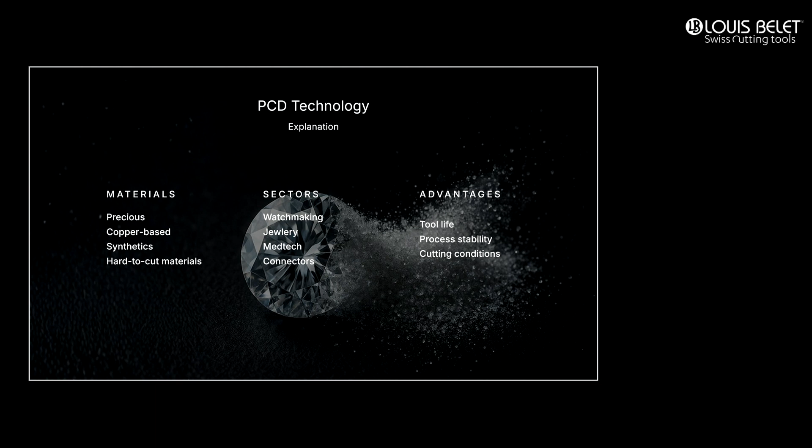But Hervé, tell us something. What exactly is PCD? Yeah, good question. Just like carbide is tungsten powder bonded with cobalt, polycrystalline diamond, or PCD, is diamond powder bonded with cobalt. So we are taking the hardest material on Earth and bonding it with cobalt to give it the toughness needed for cutting. With PCD, you can machine non-ferrous material like platinum and its alloys, gold, lead-free brass, and much more.

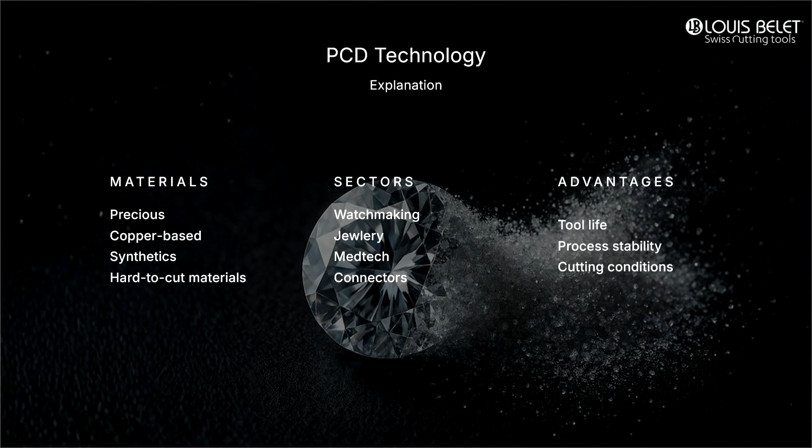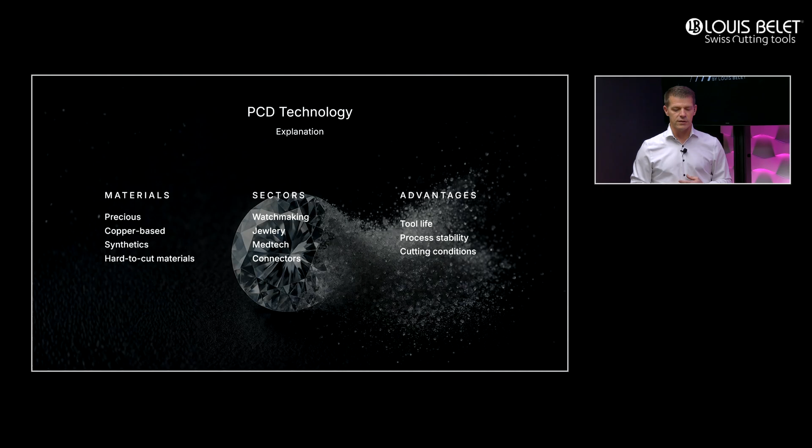But what makes it truly powerful, you can tackle the really tough materials: gemstones, ceramics, sapphires. Every sector from watchmaking through medtech to electronics needs these capabilities. The advantages of PCD are clear: exceptional tool life and the ability to run extreme cutting conditions thanks to its incredible hardness. And as we'll show you, that changed everything.

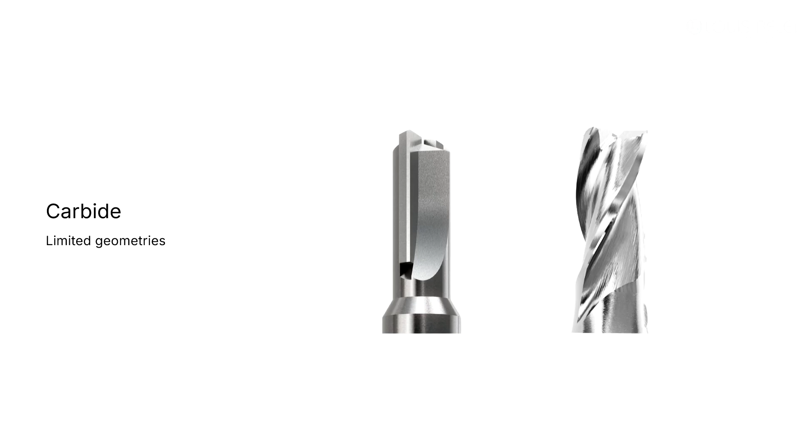So PCD sounds amazing, but I'm guessing there have been some challenges in bringing this technology to micro tools, haven't there? Absolutely. Until now, when you wanted to switch from carbide to PCD micro tools, you were limited to what we could offer: straight-edged designs on brazed inserts. It was the only way we could do it. At Louis Belet, micro tools are defined as tools below 3 mm or 1/8 of an inch.

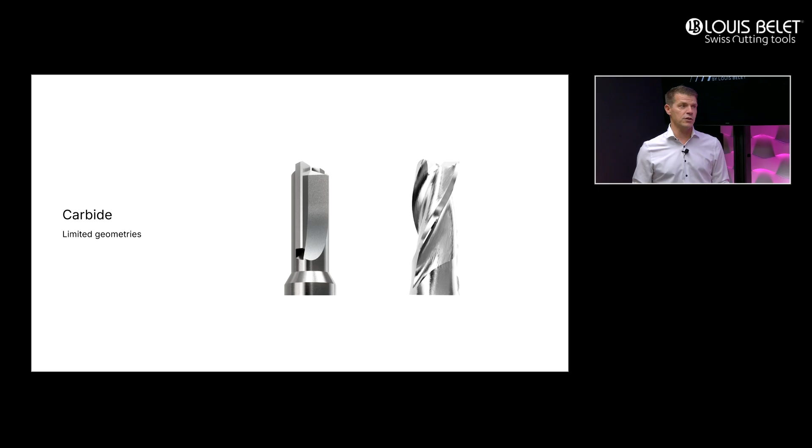But this approach had a critical limitation. We couldn't produce true micro tools because there simply wasn't room for an insert design. And perhaps more importantly, we couldn't optimize the cutting geometry the way modern machining demands, like the angles, the flute design, the surface finish. It was time for a change. And that's where Excalibur comes into play, right?

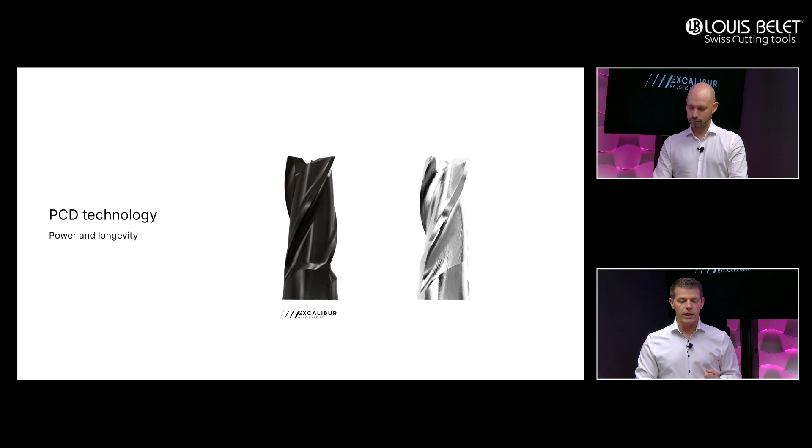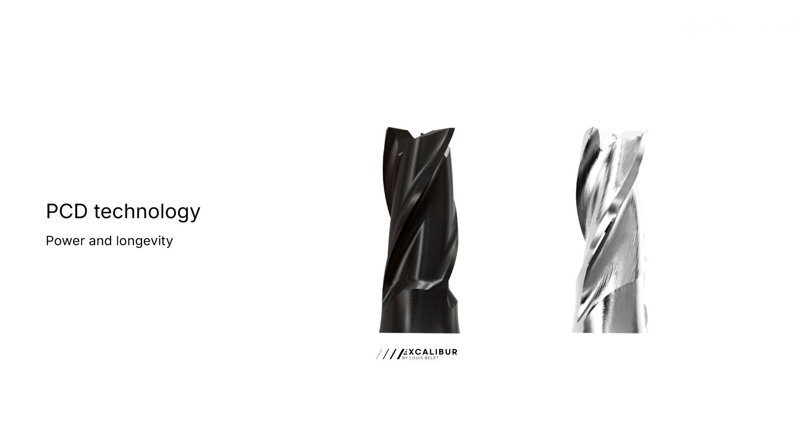Correct. For the first time, we can now offer PCD with geometries specifically optimized for cutting performance. Tools that combine all the advantages of PCD: the tool life, the reliability, the cutting power, with cutting edges that were impossible to achieve before. And here's the real breakthrough. We can make these optimized tools in sizes that were previously impossible. Micro diameters that unleash new possibilities for your precision machining.

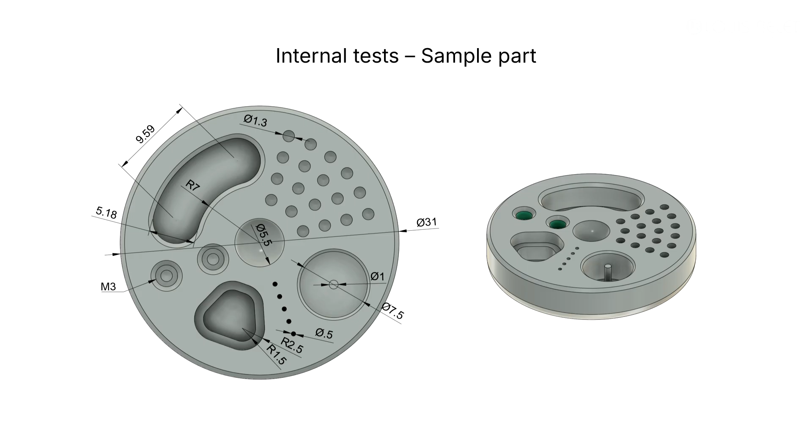Can you show us what this means in application? What you are looking at here is a part with complex geometry, multiple pockets, depths with radius features, precision holes in various sizes, and an intricate surface finish. This part will be used in this webinar, but will also be the reference for future tests, like in titanium, or any further webinars. Let's see it in action.

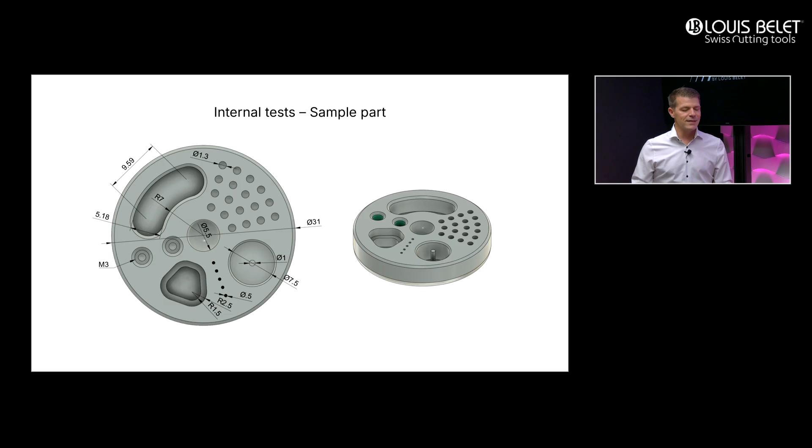Yeah, what you will see in the next slide is real machining on PEEK using our Excalibur tools. This precision component is made with unfilled PEEK, a high-performance engineering polymer used in industries like medical, aerospace, etc. This is exactly the kind of part where traditional carbide struggles. The combination of depth, precision, and the material properties creates extreme demands on tool life and cutting stability. This is where Excalibur excels, delivering consistent surface quality through an entire production run without a tool change.

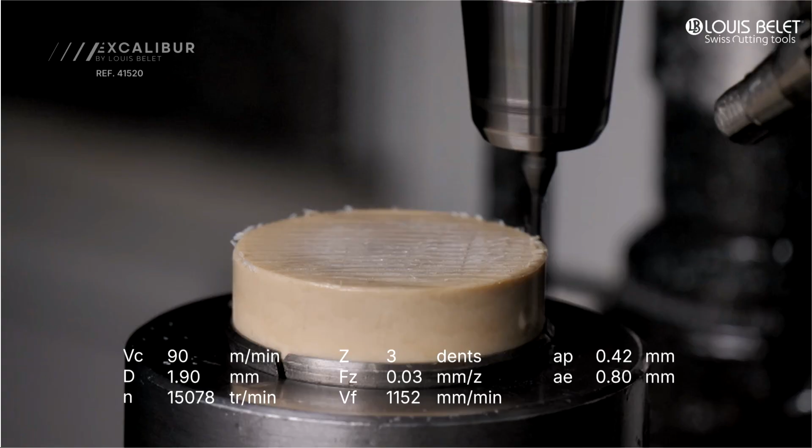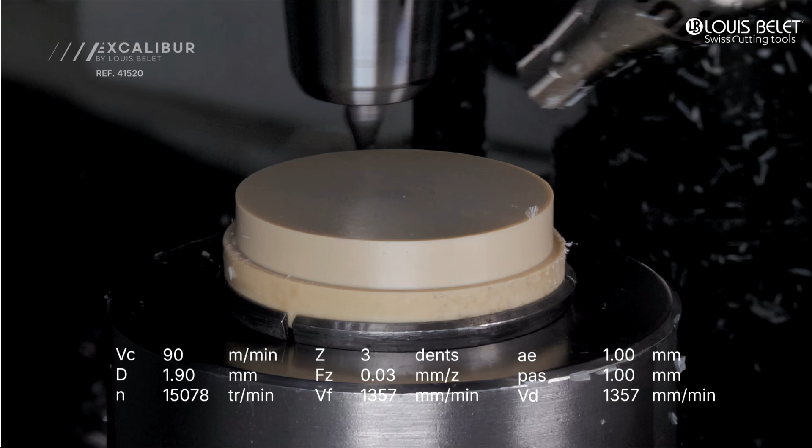You notice now the smooth, controlled cutting action. That's the optimized geometry at work. We are running a comprehensive sequence of operations here. It starts with surface finishing using a 3-flute helical end mill at 90 meters per minute, cutting at an aggressive feed rate with exceptional surface finish. Then we move into peripheral milling, creating the walls of the cavities with precision depth control.

See the transition into the slot operations. That's where we use our angle cutting tools to reach challenging geometries. The 1.5 mm or 59 thou diameter 90 degree angle end mill is working at 100 meters per minute, cutting very fine features with consistent tolerances. We are also completing pocket operations with a ball nose end mill for the radiused cavities and thread-cutting operations using our specialized whirling tool, all maintaining perfect process stability. Wow, this is production efficiency at its finest, really impressive.

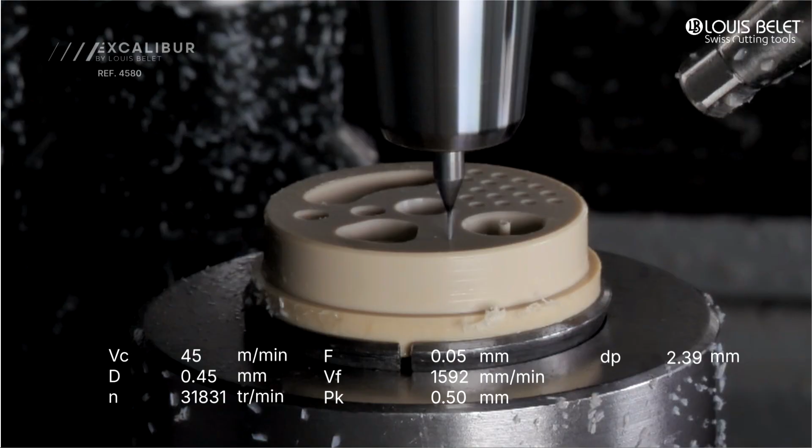For the drilling operation, we are using our 2 flute micro drills with a diameter of 0.45 millimeter, or roughly 17 thou. Notice how the PCD geometry delivers superior chip evacuation. Chip management is handled thanks to its optimized flute design.

Can you break down the specific cutting parameters for us? Absolutely. These are the precise parameters for each operation: cutting speeds in meters per minute, feed per tooth, spindle RPM, and axial radial depths. Notice the consistency. We are maintaining high productivity across all operations while the tool holds its edge throughout.

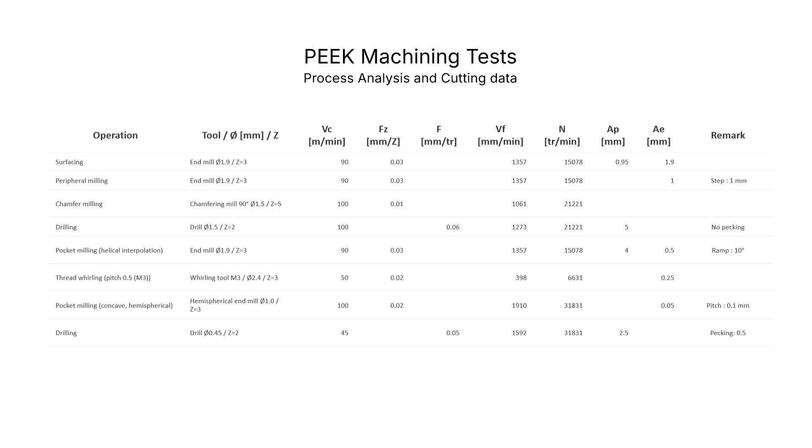This is the real-world performance that translates directly to your production line. We could think that these parameters are not too high in performance, but in order to maintain low burr, and because we are working with no coolant, 100 meters per minute is a very good performance. Notice the RPM value that needs to be handled.

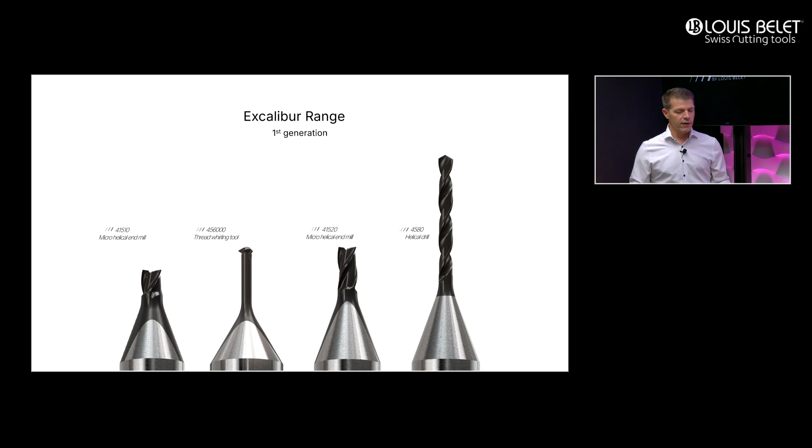So what exactly is available in the Excalibur range today? We have created 2 specialized end mills with different useful lengths, one at 1 times D and another at 2 times D. Combined with a precision 2 flute micro drill and our proven whirling tool available from S.6 to M3.0, this gives you a basic toolkit for precious metal, copper alloys, and synthetics.

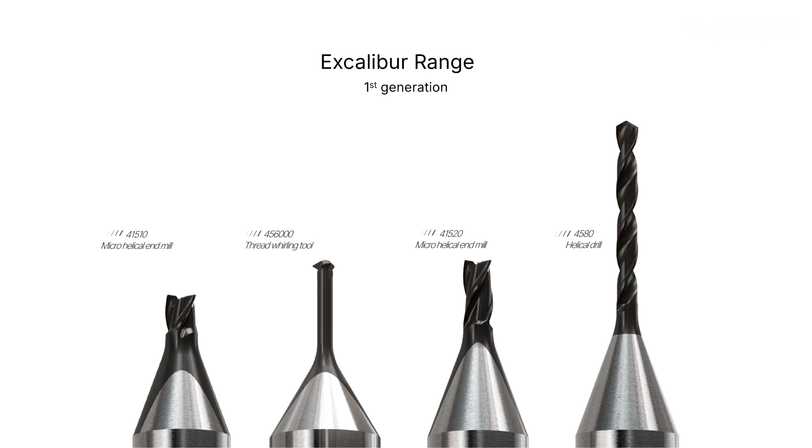Can you share more details about these end mills? Yes, we have designed our 41510 and 41520 end mills as the PCD answer to one of our best-selling carbide tools, the Series 15. That tool earned its reputation for versatility and performance, and these PCD versions raised the bar significantly.

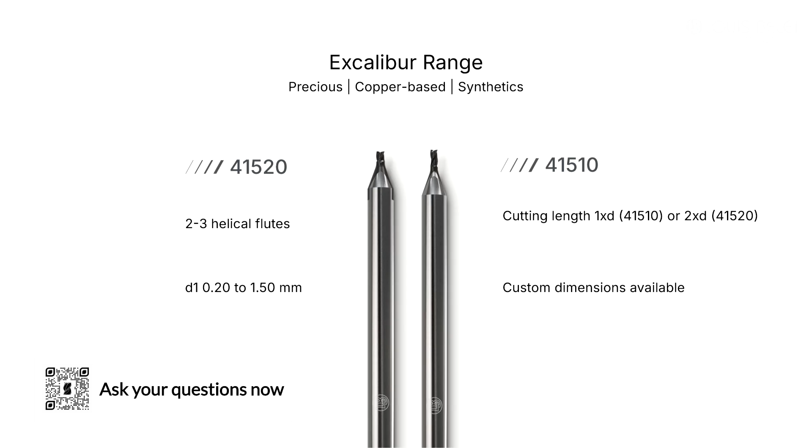Both are engineered to excel in roughing and finishing operations across precious metals, copper alloys, and synthetic materials. Our goal was straightforward: create a cutting tool with maximum cutting power to produce burr-free parts consistently, run after run. Here are the key design features.

We have integrated 6 degrees radial rake angles with center cutting capability, combined with 9 degrees angles at the diameter. The 30 degrees helix angle optimized chip evacuation and cutting dynamics. And we've reinforced the core to handle the demands of aggressive cutting.

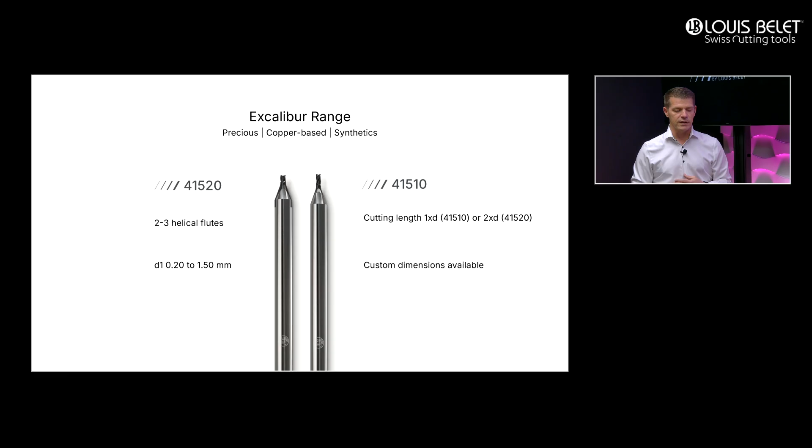For diameters from 0.2 to 0.4 millimeter, or 8 to 16 thou, these tools feature 2 flutes. Above that number, we move to 3 flutes for additional cutting power. It's precision engineering in miniature.

We saw a drill in action during the video. Please give us some details about it. Absolutely. Let's focus on our 4580 micro drill, and this one is special. Engineered for precious metal like platinum and copper alloys, the 4580 features a 120 degrees point with a specially thin core. This geometry delivers exceptional performance in challenging materials.

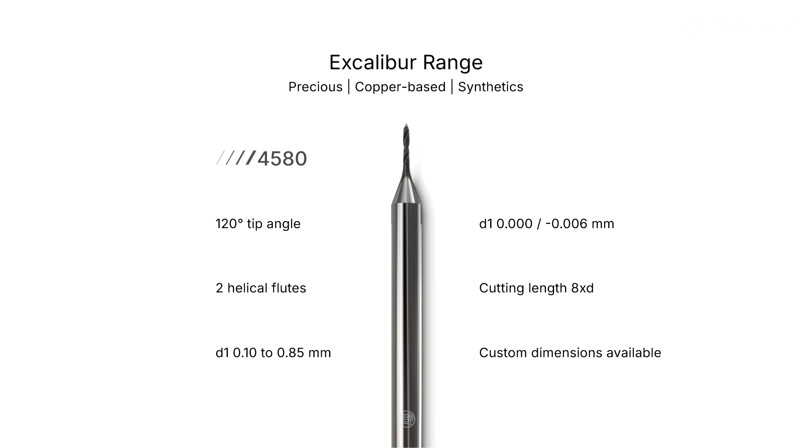Equipped with two helical flutes with a 30 degrees helix angle for superior chip evacuation, the 4580 stands out in one critical way, its diameter range. We're offering the world's smallest micro drill at just 0.1 millimeter, or a bit less than 4 thou.

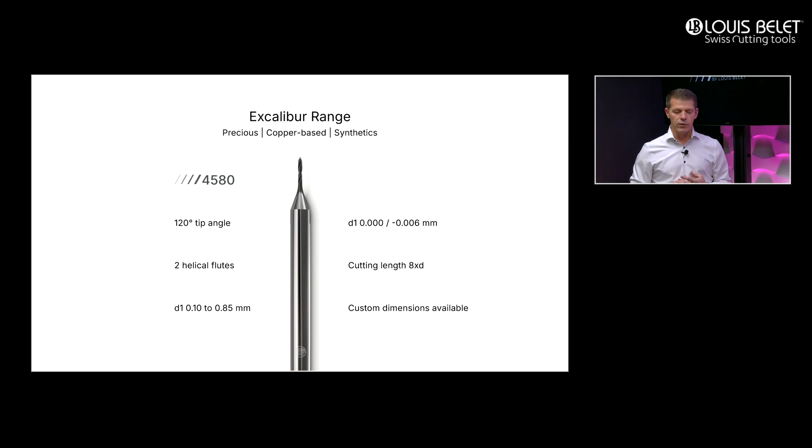The standard upper range goes to 0.85 millimeter, which represents 33.5 thou, but if you need a larger PCD drill, we're ready to support you. Just reach out. This is where precision becomes possible.

These specifications are impressive on paper, but can we see the actual cutting-edge quality? Yes, let's start with our end mill, the reference 41520. These images were captured using SEM, scanning electron microscopy, which reveals the cutting-edge quality at an extremely high magnification. As you can see, the cutting-edge geometry is remarkably homogeneous along its entire length.

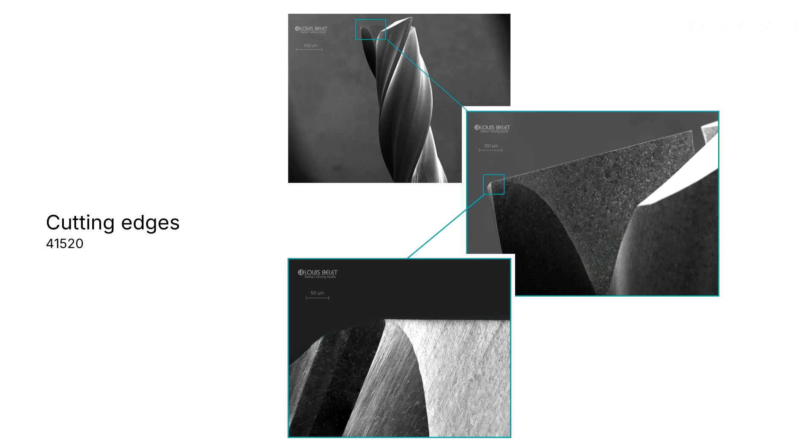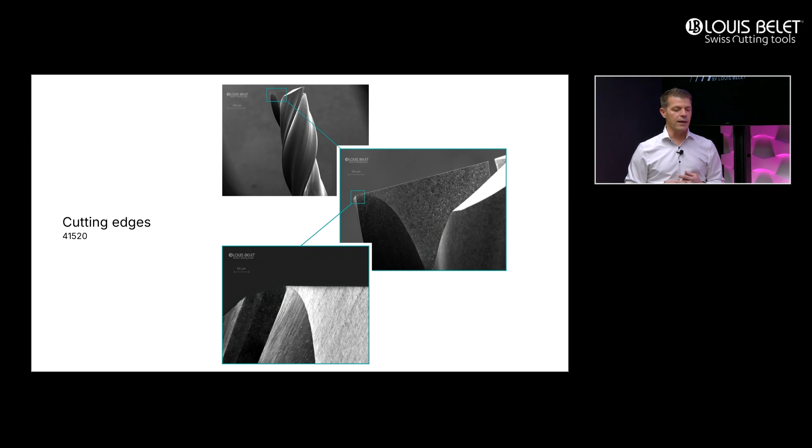Great! And let's now move to our twist drill, reference 4580. Once again, using SEM imaging, we can observe the same exceptional quality. The cutting edges are extremely homogeneous and sharp. Notice how they appear almost polished.

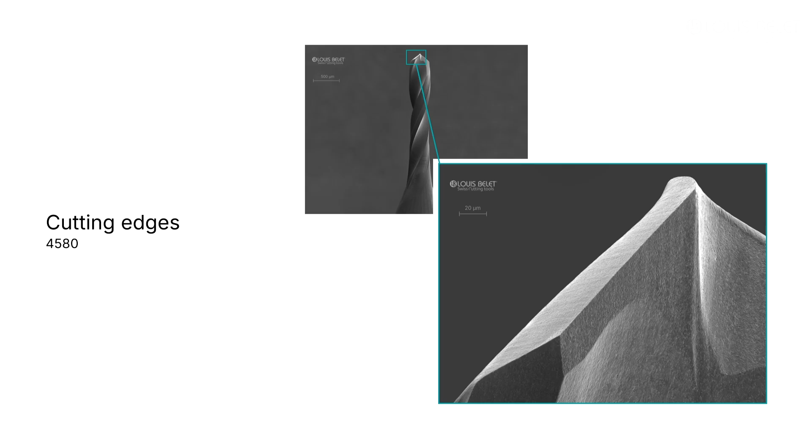And here's what makes this truly remarkable. This mirror-like finish is achieved directly through our new laser technology. There is no post-processing, no honing, no additional treatment required. The tool comes out of the manufacturing process in this condition.

Why does this matter? Because this ultra-smooth, sharp edge significantly reduces chip adhesion during drilling operations. Less chip welding means better chip evacuation, improved hole quality, and longer tool life, especially critical when drilling through hard and abrasive materials. This is the result of years of development in our laser manufacturing process, and it's what sets our PCD drills apart from conventional solutions.

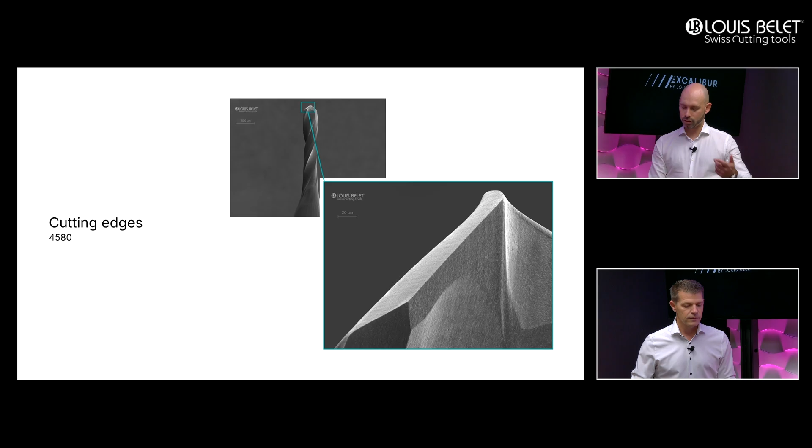This is great and nice for theory, but can you give us a practical example? Yes, one of our customers faced a persistent problem.

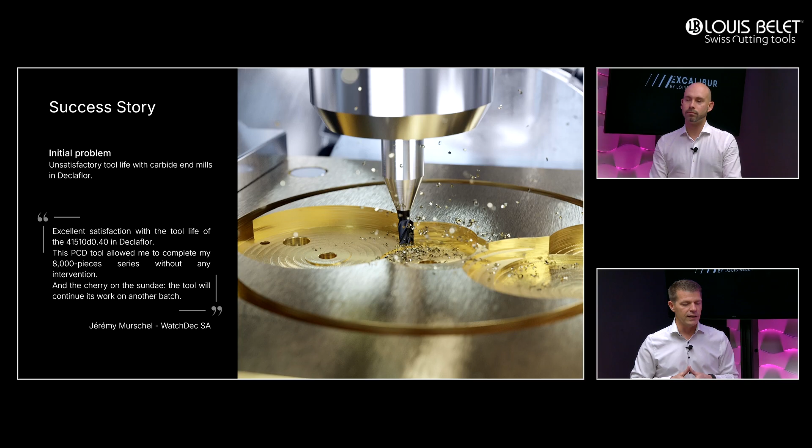Carbide end mills simply weren't cutting it anymore in their Declaflor finishing operation. Declaflor is a copper alloy with nickel and tin, used in the watch industry for movement parts and other industries. Tool life was disappointing, and they needed a solution that would let them complete production runs reliably.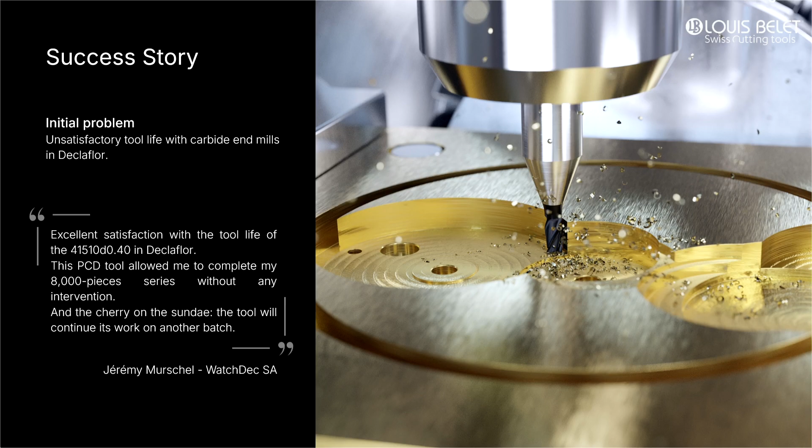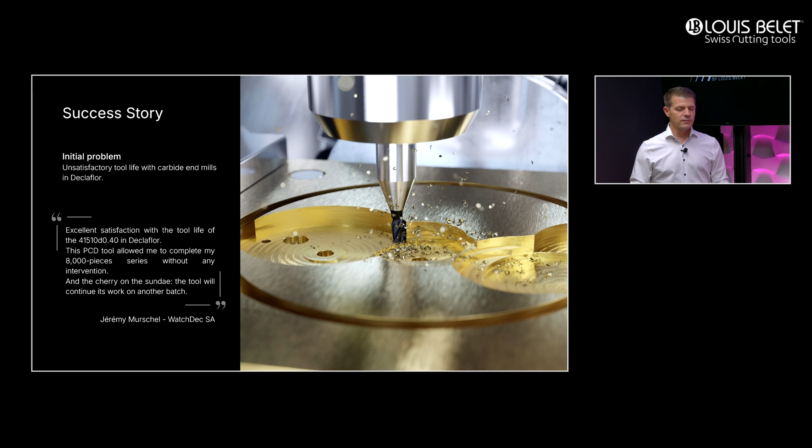They switched to our PCD end mill, and the improvement was immediate and dramatic. They completed an entire 8,000 piece production series without a single tool change. Not one. And when the tool finished the series, it transitioned seamlessly to another production run. We have to say a big thank you to Jérémy Murschel for sharing this experience.

Wow, that's not just efficiency, that's transformation. Knowing Louis Belet, I'm sure you are working on special things for the future, aren't you? Yes, absolutely. You know us very well. Today we have the honor of exclusively previewing the next phase of Excalibur development.

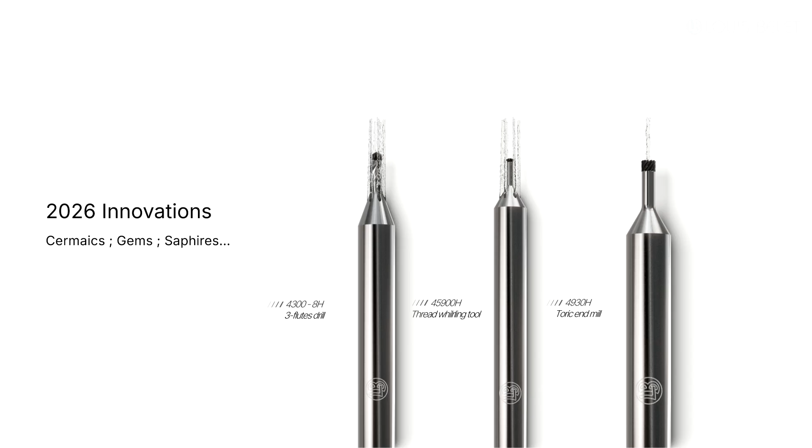These new references have been specifically engineered for the hardest materials: ceramics, sapphires, gemstones, and carbide—materials that traditional tools simply cannot handle effectively. In this expanded Excalibur range for hard material machining, you'll find specialized drills, toric end mills, and our advanced whirling tools. But that's just the beginning. We're adding ball nose end mills and angle cutting tools that open entirely new possibilities for complete geometry finishing.

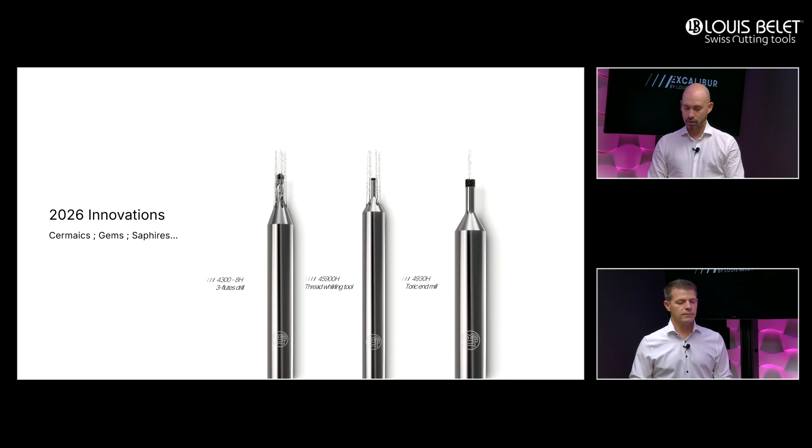As you can see, they feature coolant fed capabilities, so they bear the H for the coolant fed series. Can we see it in action? Yes, let's move to the next slide.

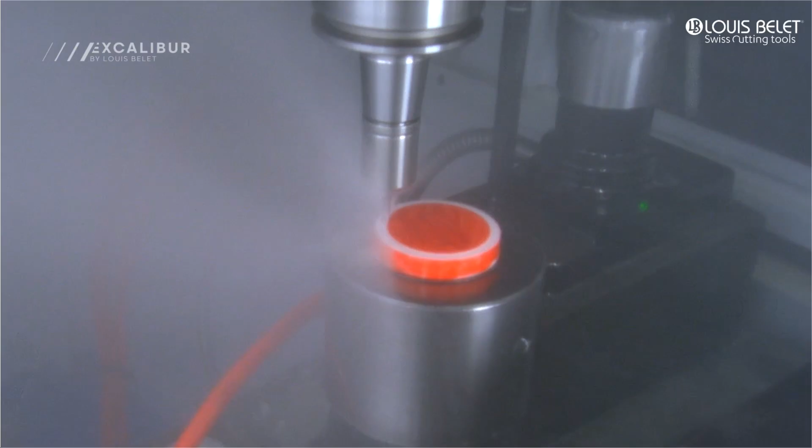Now we are pushing into truly extreme territory: zirconium ceramic. What you are watching is a complex machining sequence on ZrO2, a material known for its extreme hardness and brittleness. Our Excalibur tools for hard materials are specifically optimized for this challenge. To help visualize the machining process more clearly, we painted our workpiece orange, allowing us to see exactly what's being machined and how the tool behaves in real conditions.

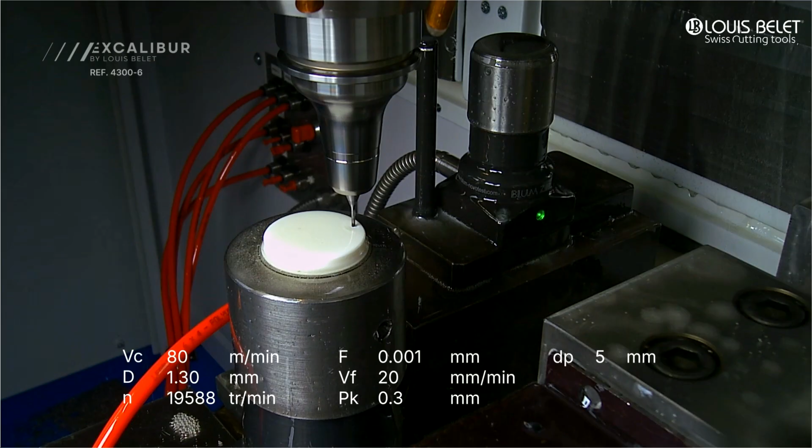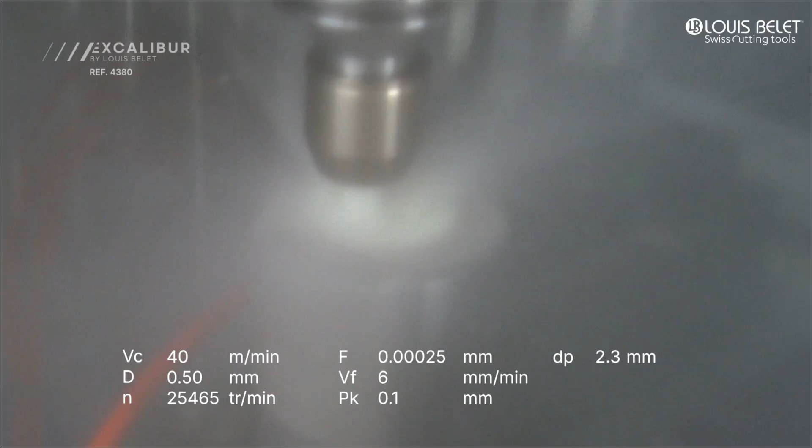We are drilling with specialized 3-flute drills reaching micro depths with perfect stability. The pocket operation demonstrates our ball-nosed tools performing intricate curved surfaces with remarkable precision. And our specialized tapping tools, with their fine geometry, are creating perfect threads formed in ceramic, which is generally one of the most challenging operations in precision machining. Notice throughout the entire sequence: smooth operation, excellent surface finish, predictable cutting force, and outstanding tool stability even under extreme thermal stress. This is PCD technology solving what was previously considered unsolvable.

Let's look at the technical parameters behind this impressive demonstration. Louis Belet has been redefining tooling for 78 years, and in the past years we have focused on PCD tools. These parameters, from surface finishing through deep pocketing to threading, represent months of research and optimization specifically for hard-to-machine material machining. Every setting here balances cutting speed, feed rate, and depth to maximize tool life while maintaining the surface finish and dimensional accuracy your application demands.

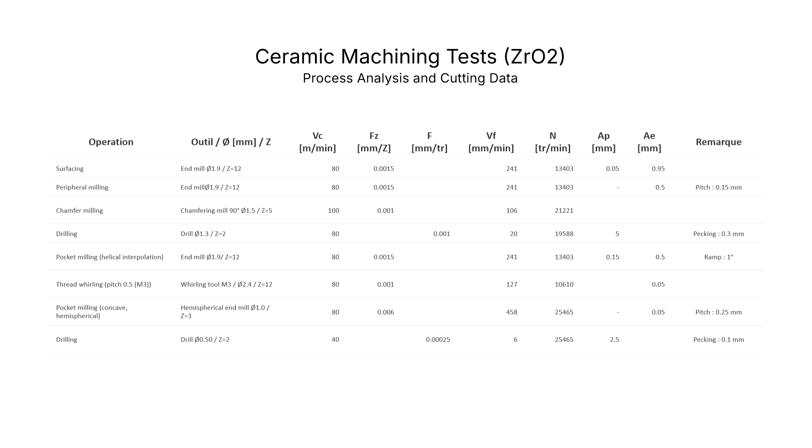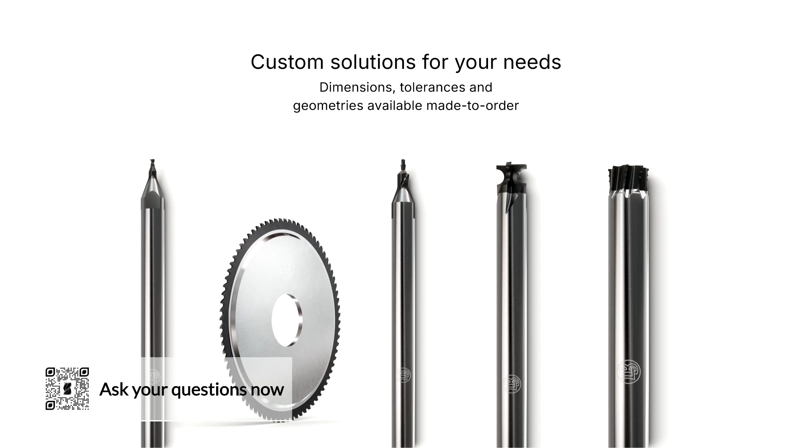So we've seen standard products, but what if customers have unique requirements? The two Excalibur families we've shown you now cover every material compatible with PCD machining. But we know that's sometimes not enough. In real production, you often face unique challenges that standard tools can't solve—that's where our expertise becomes essential. You can see on screen just a few examples of custom engineered solutions we've created: specialized shaped end mills, segmented cutting tools, multi-flute helical designs, step drills—you name it, we've built it.

Let's summarize what we've learned today. What's the key takeaway for our audience? Here's what you should take away from everything we shared today: when you have a specific requirement, our sales team and R&D specialists are ready for your challenge. But the core message is this.

Thanks to finely optimized cutting geometries combined with premium-grade PCD materials, Louis Belet now delivers cutting tools with truly exceptional tool life. Our laser technology and our mastery of it allow us to create cutting edges in PCD that were simply impossible before—edges that cut faster, last longer, and handle materials previously thought unmachinable. Actually, we made the unmachinable machinable. We definitely can say that this is the Excalibur promise. Absolutely, you named it.

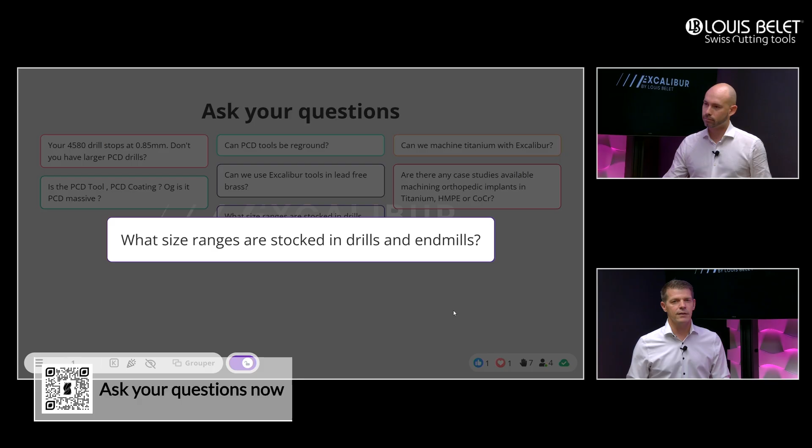What size ranges are stocked in drills and endmills? That's a good question. You can go on our website, correct me if I'm wrong, but we have a big inventory in the end mills and drills, and I think the increment is 0.01 millimeter. Yeah, but for the drills, over one whole, it depends on the dimension: it's 0.01, then 0.05, then 0.1. But you can check on our website, the catalog, the brochure, and you will find all the diameters and dimensions we have in stock.

Additional to that, if you need any special dimension, you can definitely ask us. As of today, if we have the raw material ready, we can handle that within 2 to 3 weeks, so it's pretty rapid.

What about etchers? Yes, good question. The etchers are used, can be made also in PCD, we have that also in stock. And correct me if I'm wrong, Loic, but I think there are with and without coolant engraving mills. We have both, right? Yeah.

So I have another question: can PCD tools be reground? That's a good question. The technology allows us to regrind it, but in the reprocess we are not 100% ready yet. We are working on that in order to make that possible. But if you have PCD tools in hand and want us to regrind it, send us the request with the tool design if it's not ours, and we'll be able to see what can be done thanks to our laser grinding technology.

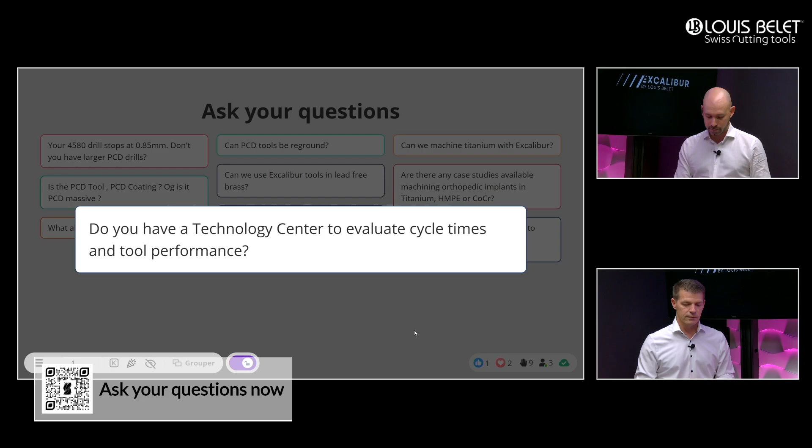Another question: do you have a technology center to evaluate cycle times and tool performance? Yes, actually we do have a technology center here in Switzerland. We have the possibility to do tests on material you have, or machining handling that you would like to test. And also in the US, we have the CME Center in Minneapolis, or in the suburbs of Minneapolis, where we can work with them to test on high performance machines directly there. So yes, we have many possibilities, and you can challenge us to test the tools.

Yes, good question. Tool life is always difficult to test, but we try to arrive at defining what's the quality after some pieces. Yes, and that's good, in our technology center. Yeah, absolutely.